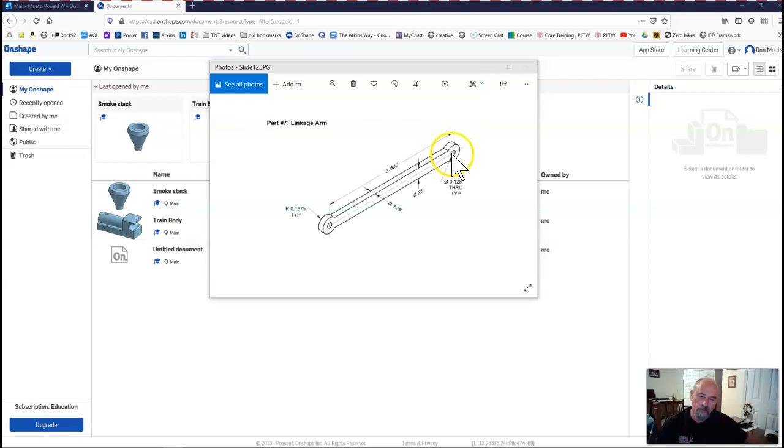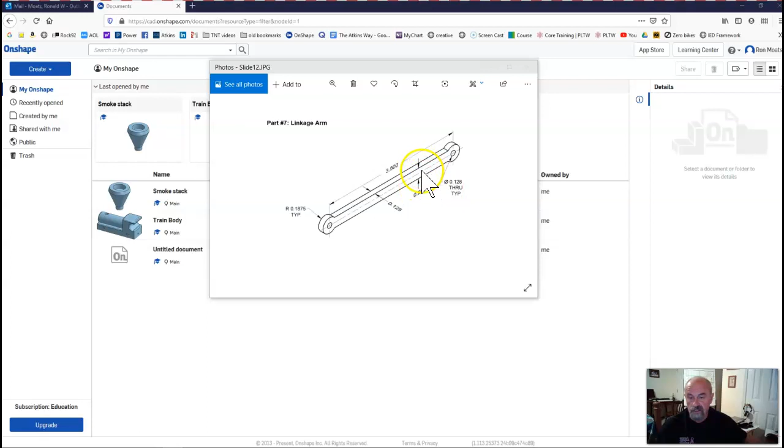As I can see here in front of me, from my center marks I have a 3.5 inch center to center on the holes. This hole, or the outer radius, is a radius of 0.1875. That's typical, meaning the other one is too. If you think back to when we were doing dimensioning, the diameter for this through typical hole should have actually been typed as diameter 0.128 through, times 2. They did this incorrectly, but it doesn't matter, we have what we have. This is 1/4 inch from top to bottom, and 1/8 of an inch, or 0.125, thick.

So I'm going to go ahead and start this. As you can see, I'm already into OnShape here. If you're using Fusion or Inventor, please close this video out and go to the correct one at this time.

I'm going to create, in the upper left hand corner, a document. I'm going to name this one linkage arm, and click OK, and wait for it to open.

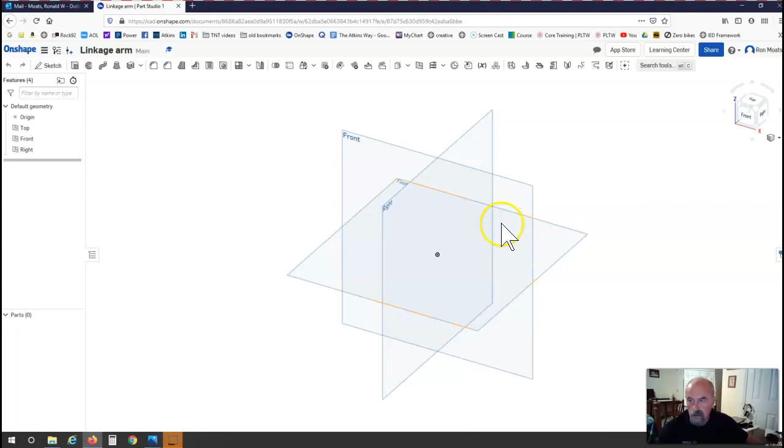I'm going to need to start with a sketch, and I'm going to choose the front plane, turn it perpendicular, and what I'm looking for here is a center mark. That's what I want. If I can't find a center mark, let me search for one. Center mark - no items match your search. Well, that's a letdown. Since I'm going to use a circle with my center mark, I'm going to go ahead and click a center point circle.

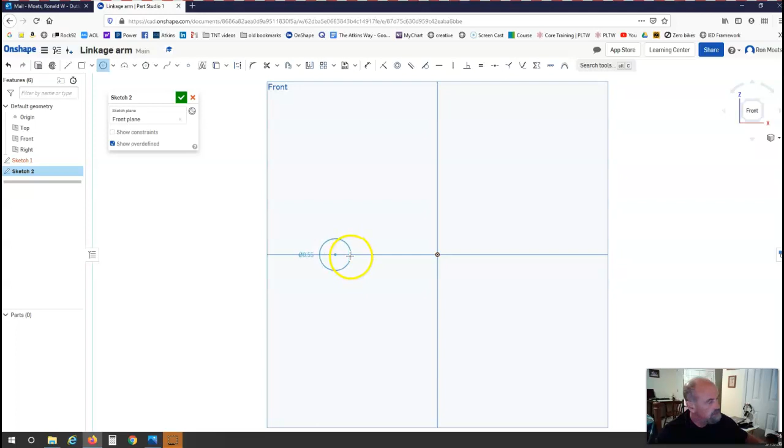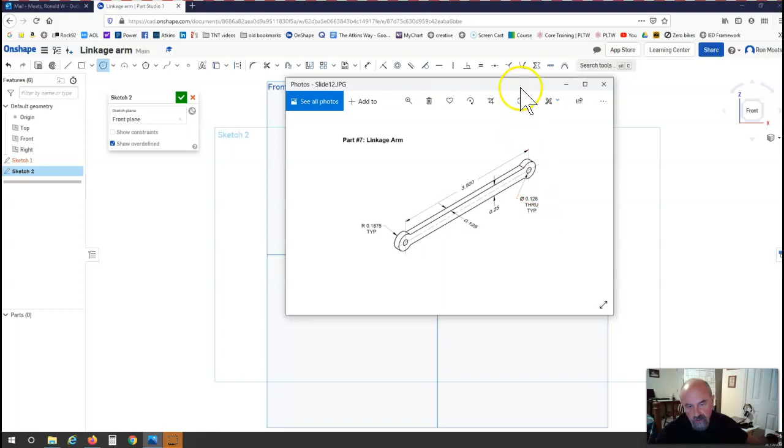And I'm going to put it on the horizontal line. Then I'm going to come over to this other side and click to create another circle. Now looking at my drawing here, it says that they're 0.128 through. So I'm going to draw the two of those, and that they're 3.5 inches apart.

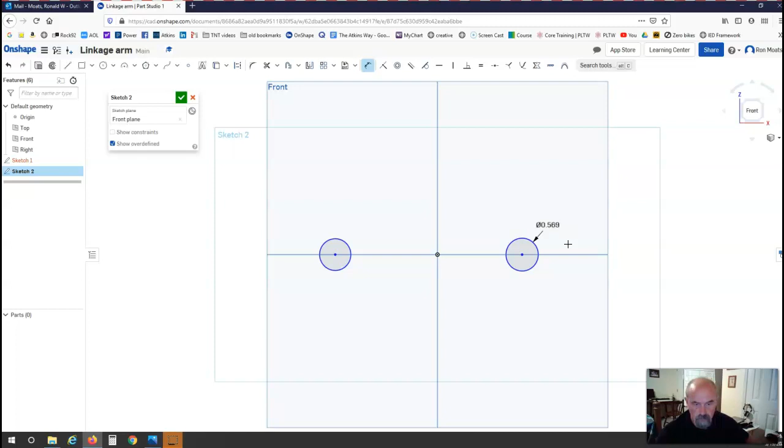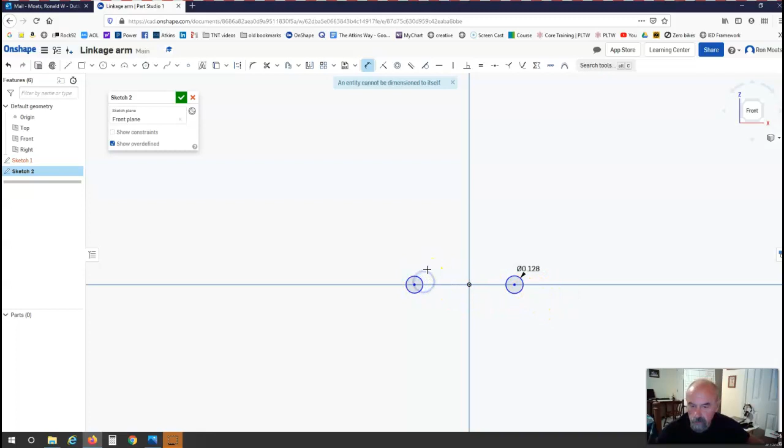So I'm going to dimension those to be 0.128. I think it geometrically locked this one on to do the same. An entity cannot be dimensioned to itself - interesting, not sure what I did there. Somehow those two, I believe, were linked together through a geometric constraint, and it looks to me like one is smaller than the other. It is, by 4 thousandths.

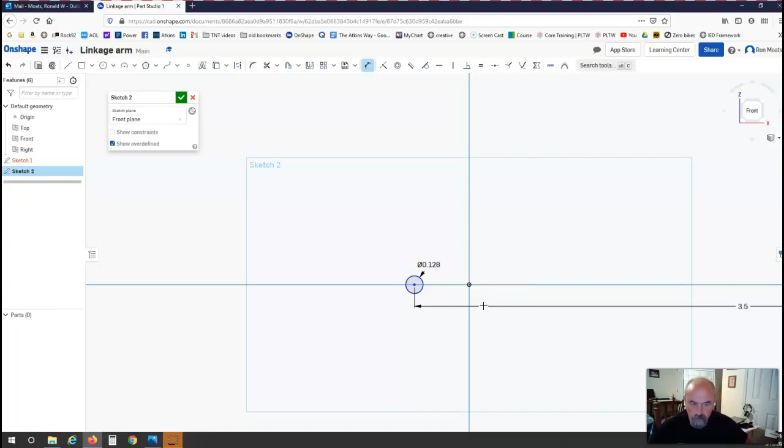So now I want to dimension from the center of this hole to the center of this hole to be 3.5 inches. Okay, all right.

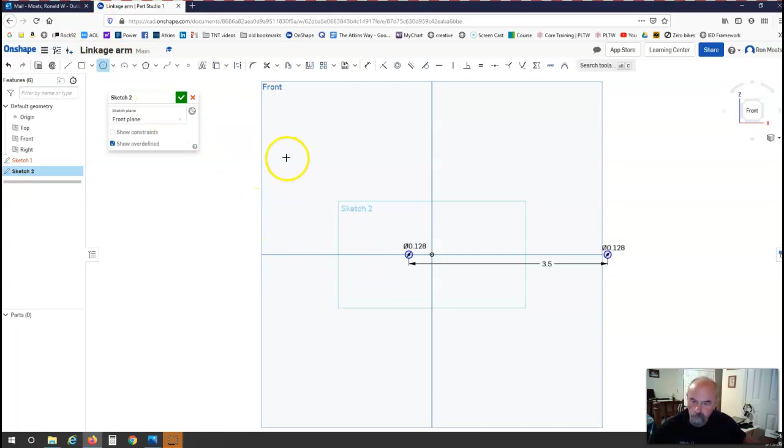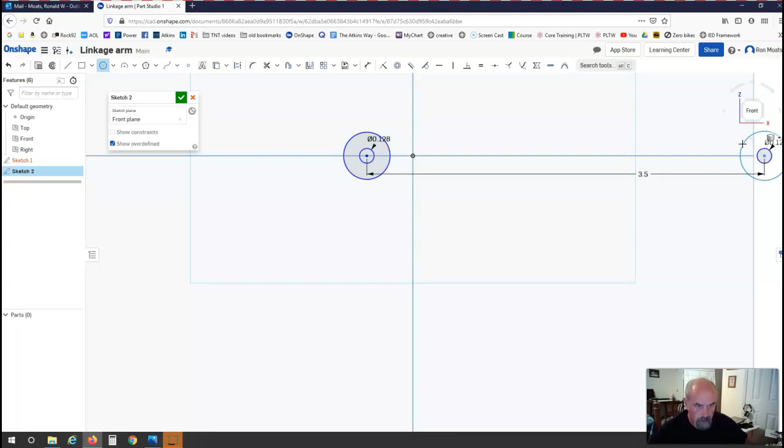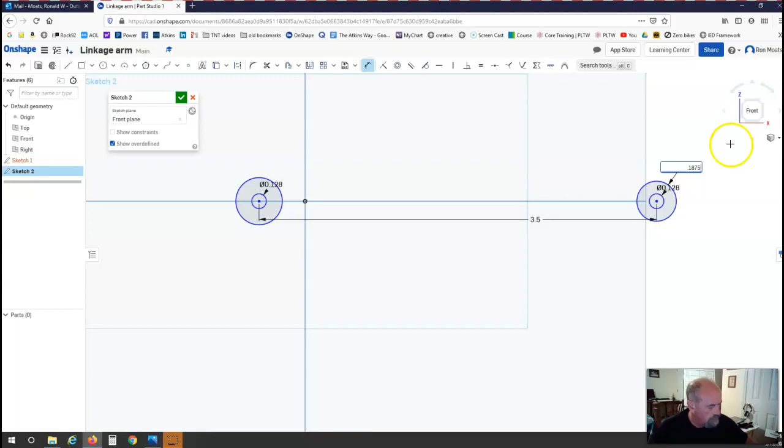So the next thing I'm going to want to do is put another circle using the same center mark as both of those. That one's going to have to be 0.1875. I keep forgetting that I can't type that in like I can in Inventor. This Onshape software is great for free software, but it does have its limitations. 0.1875 times 2, 0.375.

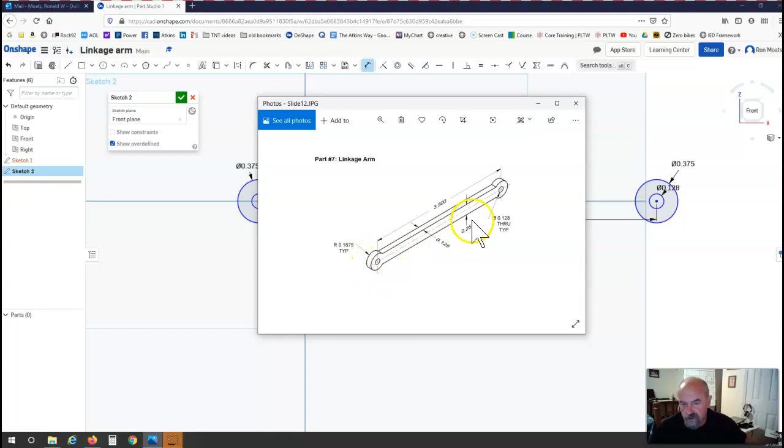Okay, now I've got my two outer circles. I need to fill this web in between, and this can sometimes require a construction line.

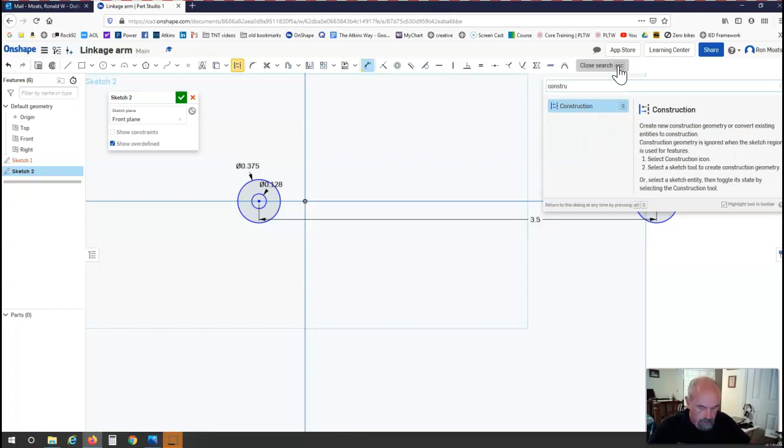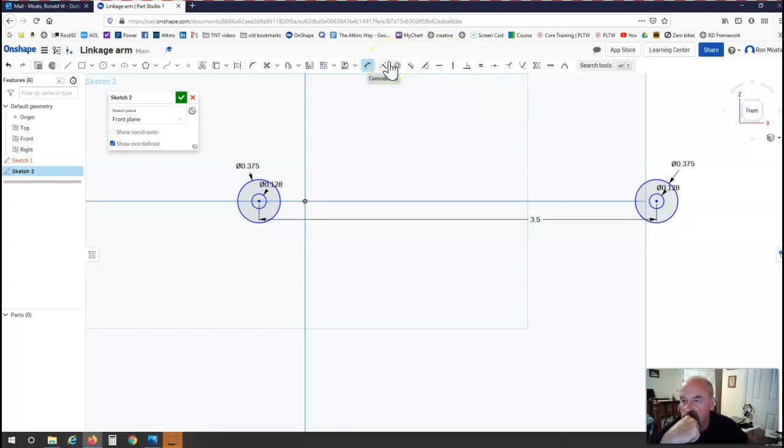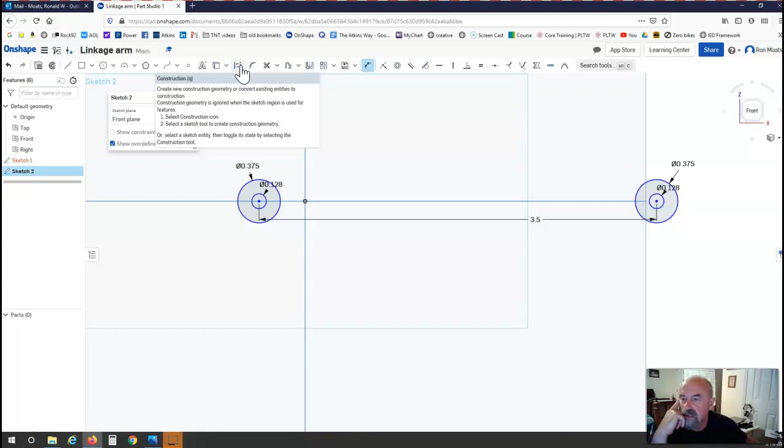Let me see where... construction line. How can you not have a construction line? I'm confused. Midpoint. Huh. Construction - create new construction geometry or existing, converting existing entities to. Well, that's what I want, from here. Okay.

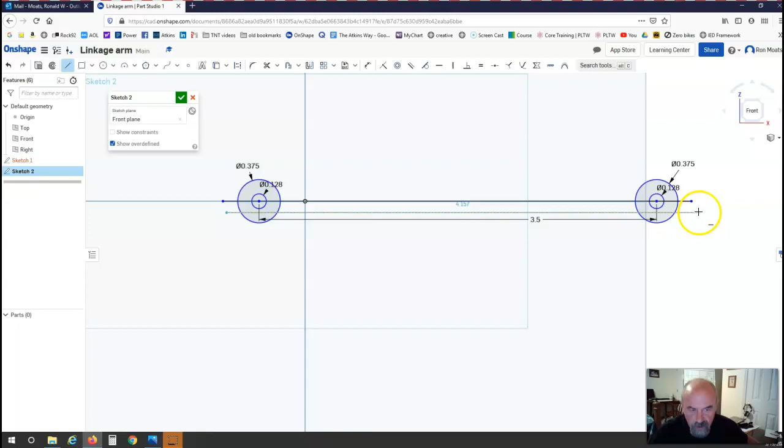So we're going to put a line right through the center of both of these, and then I'm going to click on this construction and then click on that line we just placed there. Now I'm going to come back, click on the line tool again, and create - this is creating a construction line again, and that's not what I wanted. So I click - no, it didn't.

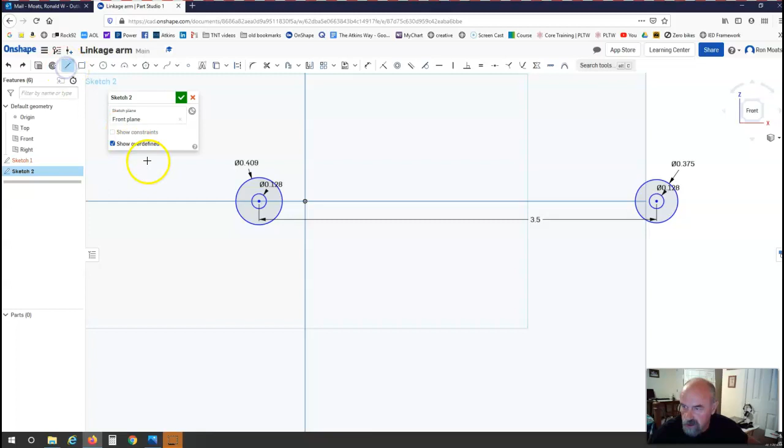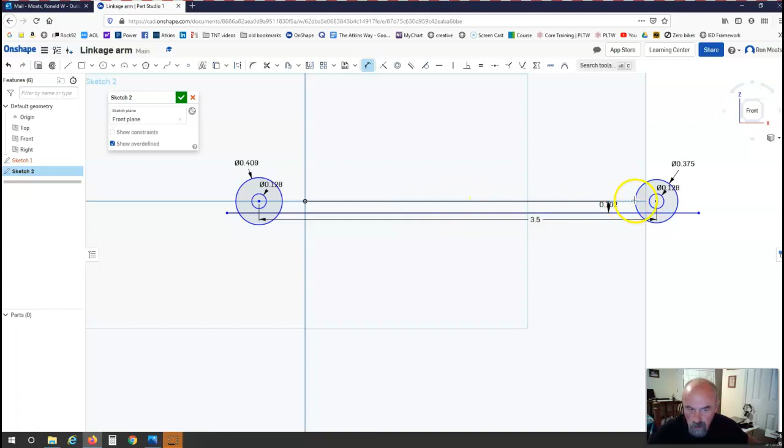Okay, I'm going to go backwards here, get rid of that line, get rid of this other line. Now let me try and put just a regular line from here to there, and try and dimension this from the center line down to be half of 0.25, that's 0.125.

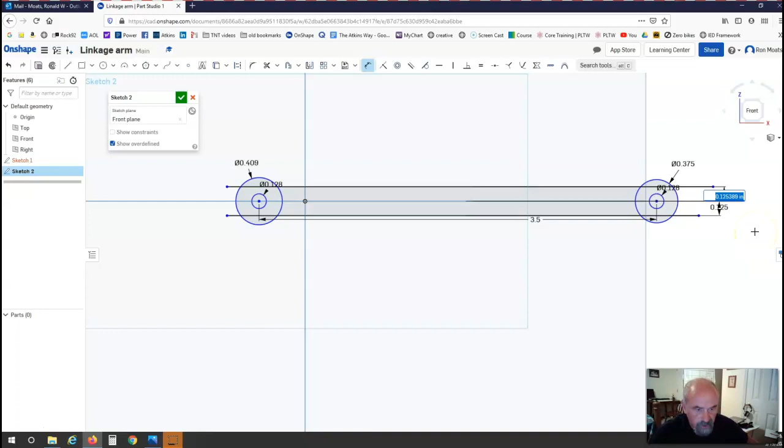Then I'm going to draw another line parallel with the center. Hit escape, and dimension that one from the center line up to be 0.125. If you look at that, just by guessing, I got it at 0.125389, but if I don't change that to 0.125, I'm going to have some other problems - it'll recognize all those extra decimal points.

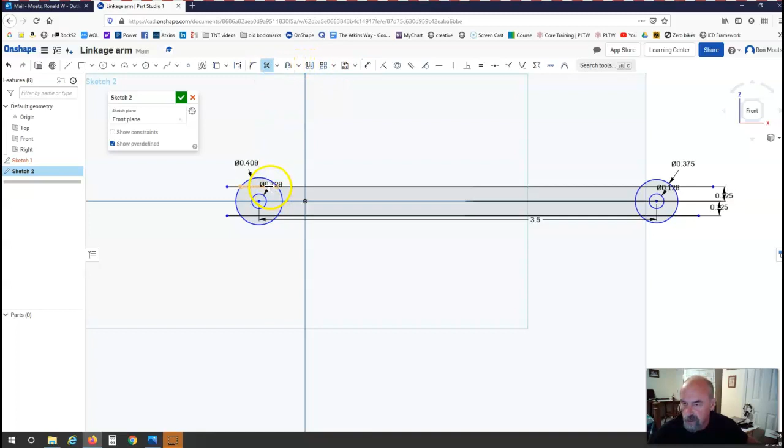So now I need to find the trim tool, these scissors in the top, and I need to cut out these extra lines.

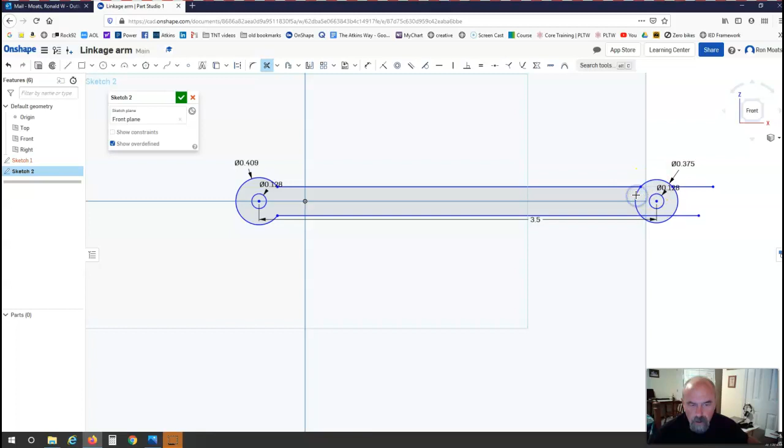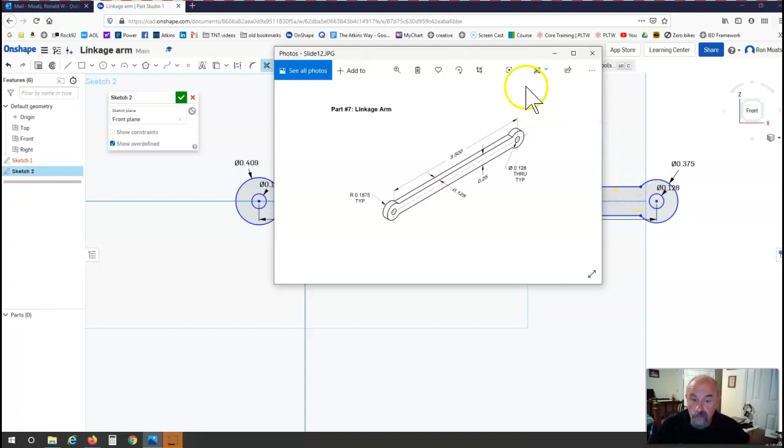Okay, the only thing that I would not do is I would have put a fillet right here where this circle meets that line - that's a stress fracture point. But they're not putting it there, so who cares, we don't need it at this point.

Okay, I'm going to go ahead and click Finish Sketch 2. Sketch 2 - how did I wind up with two sketches? Well, I can see Sketch 2 is completed. Sketch 1 did not regenerate because we didn't actually make anything, so I'm going to right click on that and delete it so that we only have one sketch.

Rename that one Sketch 1. When you wind up with designing something that has possibly 100 or more sketches, the ability to rename your sketch sometimes can save you a lot of time, especially when having to go back in and do edits for customers. So I clicked Enter after I changed it.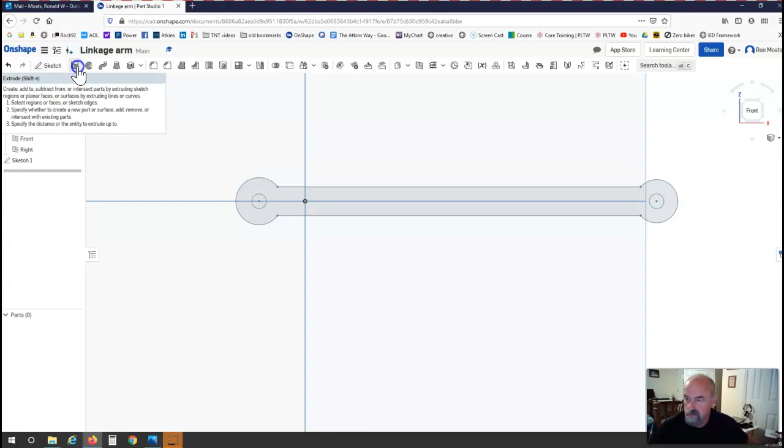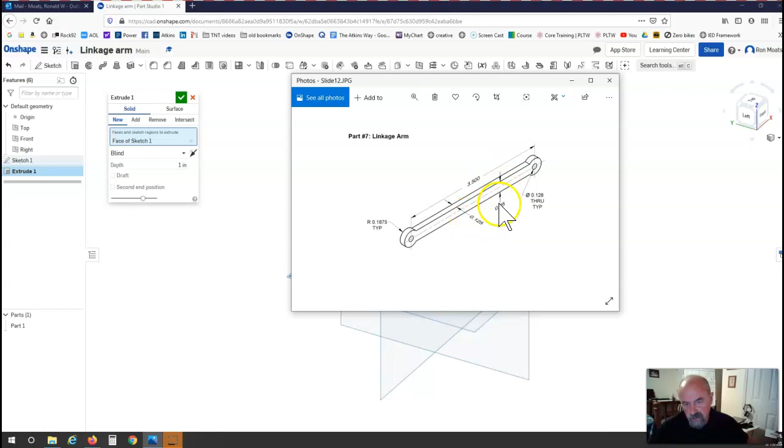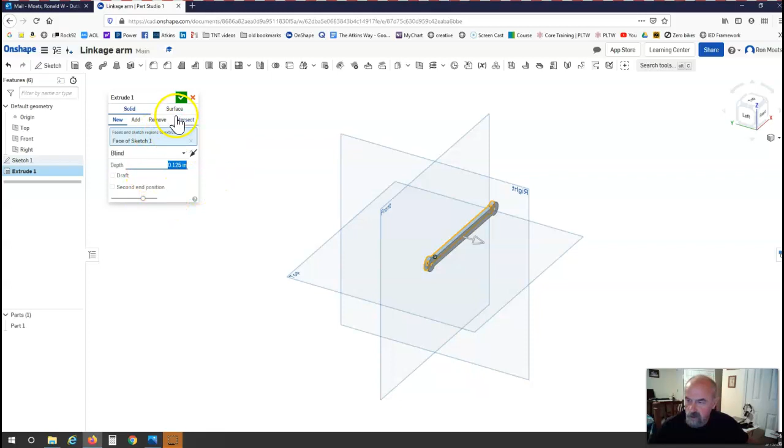All right, now I'm going to do an extrude. The distance on this was half the thickness - I can see it's 0.25 there, so it's 0.125. We're going to come over, change that to 0.125, click Enter, click OK.

And that is our part for the day, folks. Okay, Main - and this automatically saves, so we don't need to save.